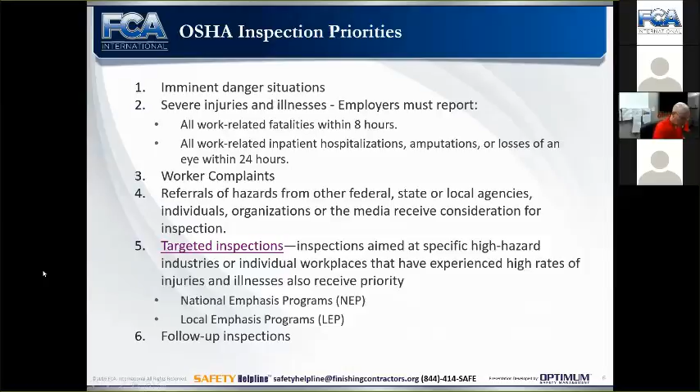So this is in Chicago, if you're on a project, once that project hits 10 stories or higher, OSHA is going to come out unannounced and they're going to complete an inspection of the job site. So that's a local emphasis program. And then our last inspection priority is a follow-up inspection. So that's how OSHA would come out and actually inspect.

And what is the process? So it's good to understand the process as well, so that in the event that you do have an OSHA inspection, you know your rights, you understand the process. So again, I've been involved in this process many times from top to bottom. Sometimes I get involved in the middle, sometimes at the very end. With our clients, it's best that they get us involved from day one immediately.

OSHA steps foot on site. They're telling the OSHA inspector, please hold on, I need to call my office. That should be a mandatory procedure for every company, right? Last thing you want is an inspection notice and citation in the mail, and you didn't even know they were on your job site. So you need to communicate that to your employees.

And at any point, if an OSHA compliance officer steps foot on the job site, they're to call the office, and we tell our clients, contact us right away. We'll get the inspector on the phone. We'll ask them to wait a reasonable amount of time, which is about 45 minutes. They will wait to get a management representative out on site. Sometimes that's tough to do if the general contractor is controlling the inspection and they don't inform you about it. Hopefully they do. Or if they're taking it on and starting, the compliance officer is going to start with them.

But there must be an opening conference, okay? There has to be an opening conference. This is where the compliance officer is going to show you their credentials. There have been stories of fake OSHA compliance officers out there just saying, hey, pay me under the table, this will go away. So they do have to show you their credentials, and they have to tell you why they're there. What's the reason for the inspection?

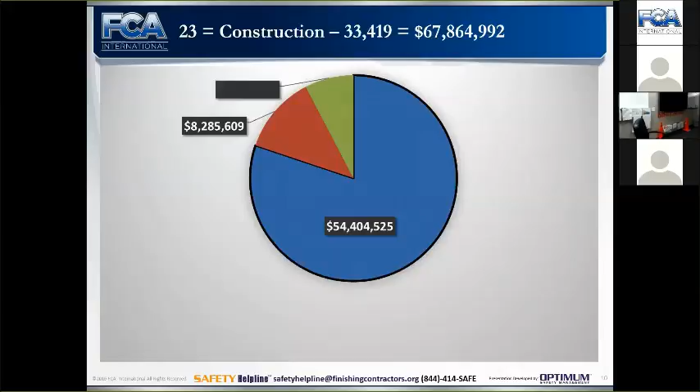So we look at construction only, and got it. Sorry about that.

My PowerPoint is all right. So we look at construction only, and in a year's time, there are about 33,000 citations, right? That total about $67 million. So again, that's half of the country. So if we double that and we increase it by 78%, we're talking about $240 million worth of penalties annually that OSHA brings in. All right, per citation, that's about $3,600. So this is pretty significant.

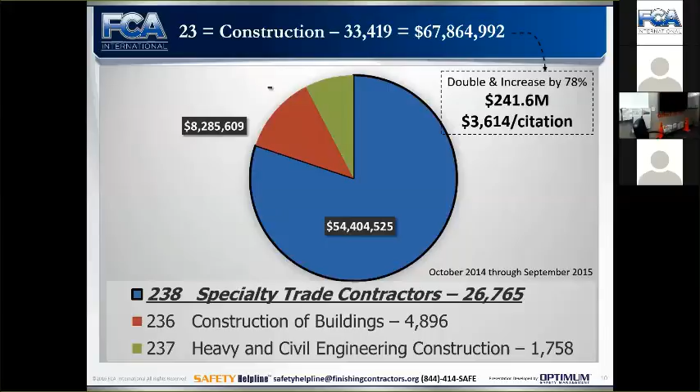Of all of that, specialty contractors are the bulk of it, over 75%. So finishing contractors, you're falling under specialty contractors. So that should get your attention, right? Construction of buildings, that's your general contractors. Heavy and civil, that's your road contractors. And now we're going on here.

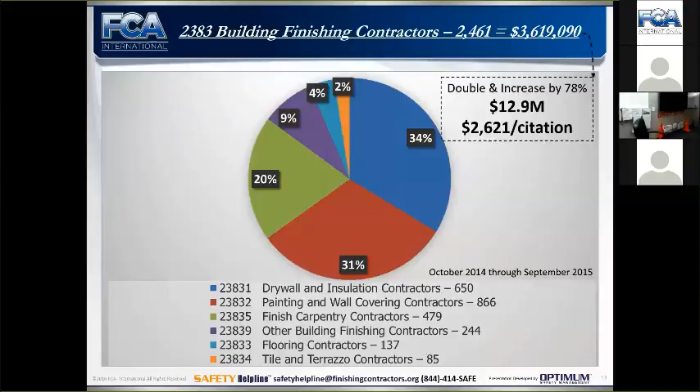That imminent danger, that's number one. Foundation, structure, enclosure, they're all exposed to outside. They can drive by and see what's going on. Finishing contractors, typically we're inside. They have to get in the building to catch us doing something wrong, okay? And then out of that, with our finishing contractors, a third of it is drywall and insulation contractors. A third is painting and wall covering, about 20% finished carpentry, and the balance is everybody else. So you can kind of see where the citations are coming from here.

Working at height, right? So working at height, the number 1 fatality in construction is falls from heights greater than 6 feet. Okay, so 1 through 6 on our top 10, that reflects the same thing. Where are the citations coming from? Working at heights. So any work at heights, you definitely need to be zeroing in on, taking a look at.

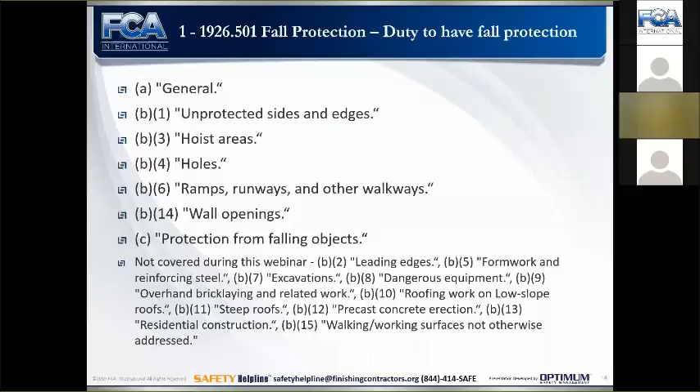So if we're getting cited for 1926.501(a)(1), we want to go into that informal conference and try to narrow down the situation, right? We want to say, hey, this had to do with a hoist area not having fall protection, so let's have (b)(3) cited. (a)(1), you can repeat that. Repeats, again, could be up to $125,000. So you don't want a citation that would be easily repeatable because it's so big in scope.

So what is 501(a)(1) saying? Pretty much all it's saying is that the employer is required to provide fall protection systems, as stated in 502. Okay, great. (a)(2) is talking about structural integrity of the floor, right? So if we're sending someone into a remodel, let's say, we need to know that floor is structurally sound. So walking working surfaces structurally sound. Okay.

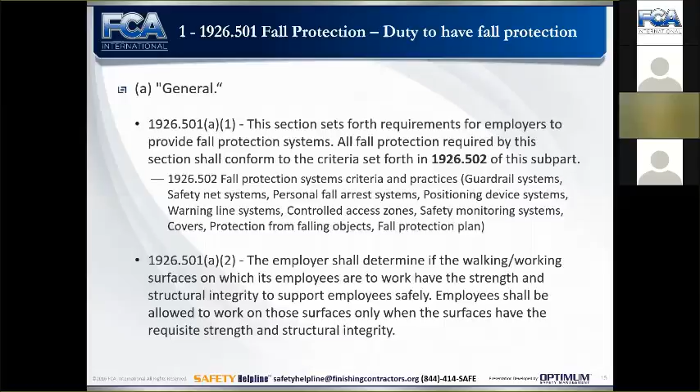So unprotected sides and edges. Anytime we have an unprotected side or edge and a fall hazard of 6 feet or more, we must protect our employees with a guardrail system, safety net system, or personal fall arrest system. That is it. So if you're using anything else, chances are you're out of compliance, right? Safety monitors, warning lines, controlled access zones have nothing to do with finishing contractors and everything to do with precast, bricklayers, leading edge, roofers.

Okay, so if you're trying to rely on something like the safety monitor, warning line, fall protection plan, controlled access zone, let's relook at our operations. Let's do a job hazard analysis. Let's put into place guardrail systems, safety nets, or personal fall arrest systems, because per OSHA, that's all you can use.

Okay, hoist areas. So I see this a lot. We're going to hoist material in through a window possibly, or we're going to take a guardrail down to lift up material to another floor, right? We need our fall protection, a guardrail system or personal fall arrest system. It has to be in place before we take that window out, before we take that guardrail down.

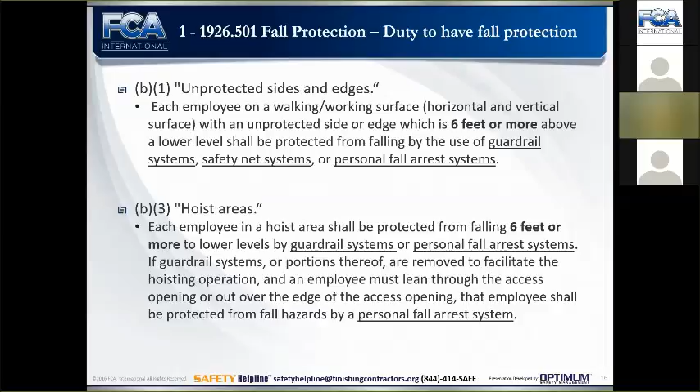And then we have our controlling contractor. That's the general contractor. If they knew about this or there was a pattern of people taking down guardrails, leaving them, exposing other contractors, right? They're going to get roped into it as well. So this is exactly what we're talking about here when we're loading in to these areas.

So if there's a fall hazard, again, 6 feet or more, that's the magic number for federal. I know Cal OSHA is 7.5. I'm not sure about other state plans, but federal OSHA is 6 feet when we're talking about unprotected floor edges on walking working surfaces. We'll get into scaffolding. Fall protection requirements are a little different there, where they let you go up to 10 feet. Steel erection, we don't need to talk about because finishing contractors, we're not doing steel erection. They have some special rules there.

General industry, well, we're construction, so we're going to stick with their 6 foot. General industry is 4 foot. So 6 feet is the magic number. That's the one we want to be thinking of at all times. So do we have the personal fall arrest system in place before we take the guardrail down? Do we have some kind of barricades up behind where other employees can't access that area?

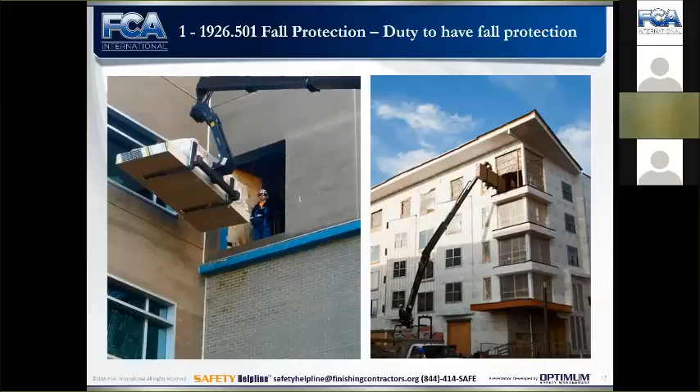Holes. Absolutely. Holes need to be covered. So OSHA defines a hole as a gap or void 2 inches or more in its least dimension. So you can have a 1.5 inch slit going 10 foot down a floor, and that's not considered a hole. All right. Probably still a good idea to get it covered. We could kick stuff down there. You know, maybe OSHA could cite us for other reasons if the floor was dirty and people were walking down there and stuff was falling, right? But technically it's not a hole. So 2 inches or more in its least dimension.

So any core holes, obviously, any square openings, they need to be covered, right? When we have a fall hazard of, again, 6 feet or more. They call out skylights in the standards, skylights. So these are huge. So if you're up on a roof area and there are skylights, we have multiple fall hazards to consider, including fall off the roof, right? So we'll get into talking about parapet walls here in a little bit. But what about these skylights? Are they protected?

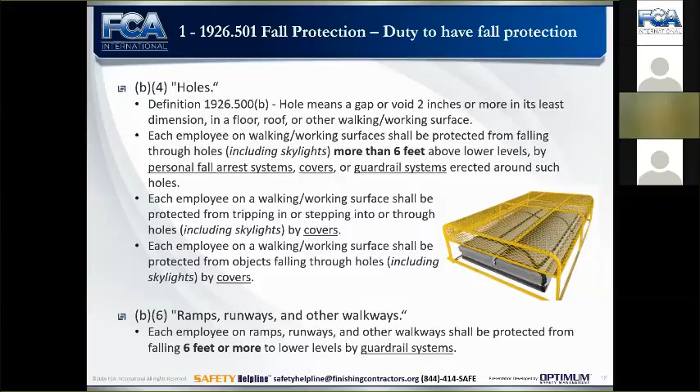Wall openings. So they call out trash chutes, which is a great example, trash chute, but any wall opening, all right? If the opening is 39 inches off the ground, you're good. Any lower than that, we have issues. When we talk about guardrail requirements, this all makes sense. So that opening cannot be lower than 39 inches. Once it is, we need a guardrail system in place.

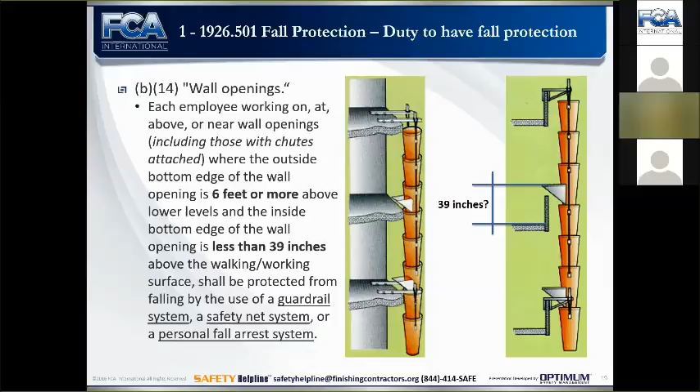Protection from falling objects, absolutely. So anytime we're going to have a floor where objects could fall, or a mezzanine level where objects could fall, or some scaffolding where objects could fall, we need to protect our employees. OSHA says we need to protect them with a hard hat plus one of the following measures. So we're getting into where OSHA's calling out now some PPE, right? Personal fall arrest, by the way, is PPE. So we've already been talking about PPE.

When we're thinking of hazards, we want to think of the hierarchy of controls. And it doesn't start with PPE. So a lot of times we're thinking, oh, there's a hazard, throw some PPE on them. That's our last line of defense. Always our last line of defense. So we want to be thinking, how do we eliminate this hazard altogether? If I can't eliminate it, how do I protect the employee with some kind of administrative control, some kind of plan, procedure, some kind of engineer it out with the guardrail system, right? Engineer the hazard out. Last, PPE.

So we need hard hats, and then we need erect toe boards, screens, guardrail systems. Maybe we need a canopy, right? An overhead canopy. So different areas, barricading off areas. So when we're talking about loading, we saw the picture of the gentleman loading drywall into a building. What's going on below there? We got to restrict access from employees walking under there. How are we doing that?

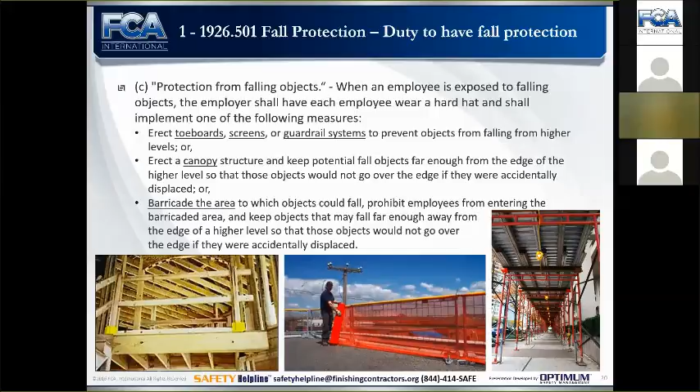Hopefully, at bare minimum, we're putting up some danger tape. That's an extremely dangerous situation. That fall could potentially kill someone. So warning tape would not be acceptable. Minimum would be danger tape. A lot of general contractors are moving towards a robust physical barrier. So some kind of guardrail system, some kind of a barricade system that, you know, someone can't just duck under the danger tape, or we can't walk through it, or it rips, or it's blowing around in the wind. They want something sound and structural there.

So we're going to jump down to number 5, since we're talking about fall protection, and we just talked about guardrails, personal fall arrest systems. But OSHA has more to say. They have specific system criteria and practices for all of this. So we not only have to have the fall protection in place at the right time, we have to be using it the right way as well.

So we're going to talk about all of these. We are not going to talk about positioning devices, warning line systems, controlled access zones, safety monitoring systems, or fall protection plan. If you believe you need to use one of those for something and have further questions, great opportunity to reach out to the safety helpline.

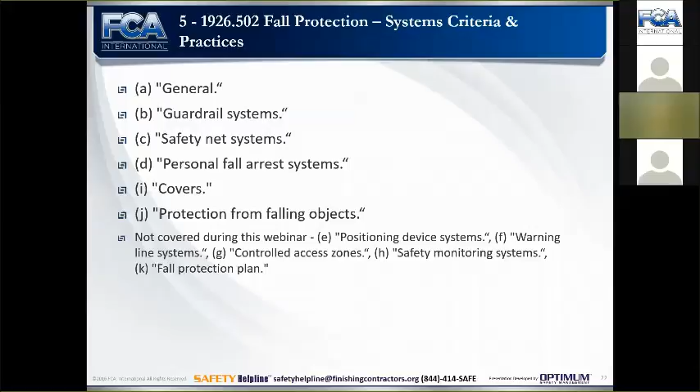Okay. So general, 502A, they're saying that we have to comply with everything in this section. And then they're saying that the fall protection has to be in place before the employee begins the work, before the hazard occurs, before they're exposed to the hazard. Pretty common sense, right? We got to have the fall protection in place beforehand. So makes sense to me.

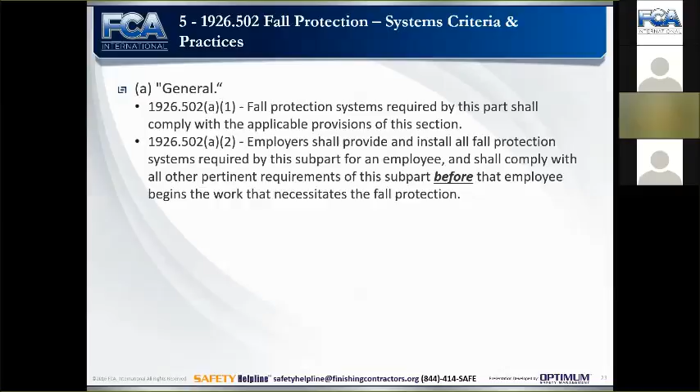Guardrail systems. Okay, top rails, 42 inches plus or minus 3 inches. So they're giving us a little bit of leeway there. They do that for multiple reasons. One example, if we're talking about that trash chute, was at 39 inches, or if it was at 40 inches, you know, we have some play there. Parapet walls have a little play there. Anything below 39 inches, we're going to have an issue with.

We talked about that. Also, a lot of times when we pour the concrete on a metal or wood deck, we're going to lose the 4 to 8 inches. So it allows us to erect a guardrail at 45 inches, and then when we pour that deck, maybe it's at 39. So we get a little play there.

That top rail must be capable of withstanding 200 pounds of force in an outward and downward direction. So think about it. When someone's going to fall, they're going to fall down and out. So that guardrail system has to be able to support that. And when it's supporting that 200 pounds, it cannot deflect below 39 inches, which is our 42 inches minus 3. So that's an important number, 39 inches. Cannot deflect lower than 39 inches. So wood guardrail, if it's deflecting that much at 42 inches, I'm pretty sure it's broken by then.

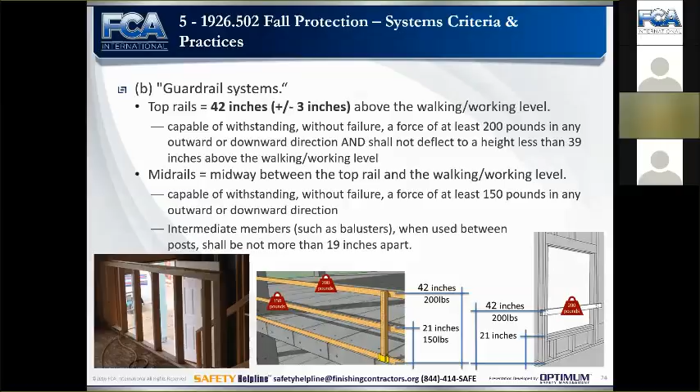We can use intermediate members in lieu of a mid rail if they're posts not more than 19 inches apart. So a lot of times we see this on our stud walls, 18 inches on center. You can just throw a top rail there and don't necessarily need the mid rail if they're not more than 19 inches apart.

Wire rope, so we already talked about this, the 39-inch sag, and yes, they must be flagged every 6 feet for visibility. A lot of times we see wire rope up for guardrail, and it's not flagged, and you just can't see it. So every 6 feet, that's as easy as tying caution tape on it. Sometimes the caution tape will slide all the way to one end, so maybe not a good situation if you're outside. Using high visibility netting, or any kind of visible netting for that matter, works just fine.

On the right, we have an example of a parapet wall, obviously lower than 39 inches, so we need a guardrail system, and it looks like it's maybe only 12 inches, so they have a mid rail on there as well. On the bottom left, we have some window openings. Again, if those are 39 inches, we're good. We don't need anything else. If they weren't, they would need to put some more protection up.

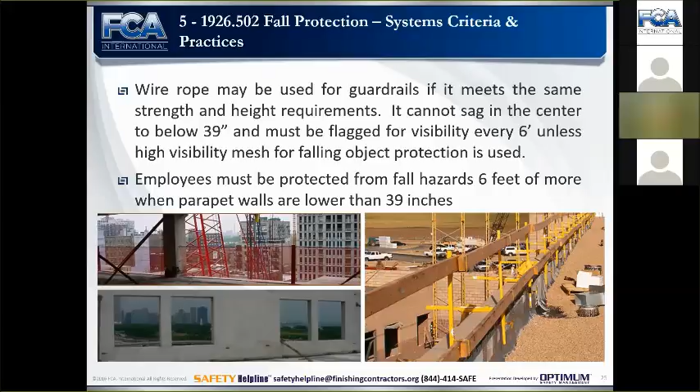Safety nets. We don't see this that often. Sometimes we'll see safety nets in a hole opening, a lot of times as secondary protection. I've seen it where it's actually underneath a hole cover in the event that hole cover gets removed and someone falls. They have the safety net there as a secondary means. You'll see them sometimes on some buildings outside the building. A lot of times it's for material, but it can be used for personnel as well.

In some situations, it might be useful, definitely as a secondary means. I've also seen people use personal fall arrest systems with safety netting below them. In the event that failed or someone forgot to hook up, the safety netting would catch them. Personally, I don't think it's a great choice for a primary means of fall protection. There are some very specific requirements here. We're not going to get into all of them, but the sizing of the mesh opening, the border rope strength, the type of connections. So you really need to dig into that if you're using these.

Depending on how far below the fall is, they need to be out a certain distance. So if they're up to 5 feet below us, they need to stick out 8 feet. 10 is 10, and then they can only be a max of 30 feet below us, and they need to stick out 13 feet. It's just kind of crazy thinking that someone would fall 30 feet into a net. But something to look at. Probably not going to be using that.

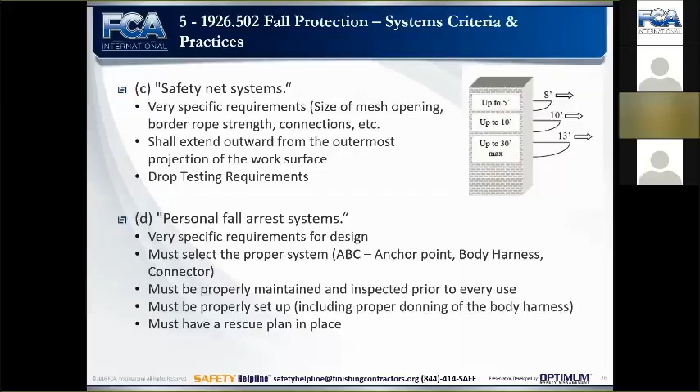A lot of good examples here. Top left, you have a horizontal lifeline system. Next to that, you have a vertical lifeline system with a rope grab on it. So again, you have the body harness, the anchor point, and then what's in the middle is connecting them. On both of these, it's a 6-foot lanyard with a shock pack. On the right here, you see a retractable lanyard.

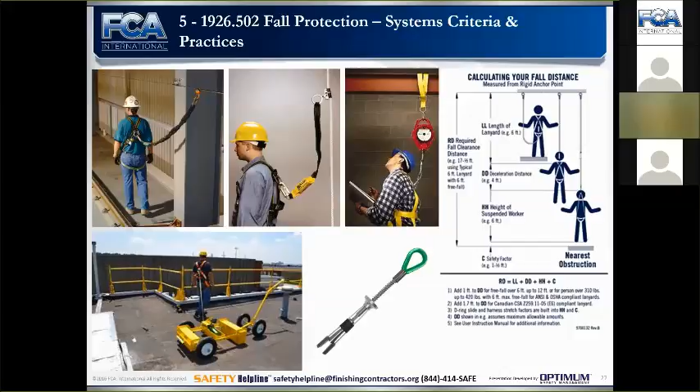So depending on the clearance distance below us, yeah, we say you need fall protection if you're exposed to a fall of 6 feet or greater. That doesn't mean that that's going to stop you from hitting the ground, right? If that fall is right there at 6'1", and you have a shock pack 6-foot lanyard on, and it's hooked up right at your back level, and you fall, by the time that elongates, you're hitting the floor. Probably not a good option. You need to get that elevated above your head, or a retractable, which is going to stop you a lot sooner. A lot of systems out there, drop-in anchors, where you drill a hole into a concrete wall and put a drop-in anchor.

Here's an example of one of the toolbox talks that all FCA members can have access to. We'll talk about that at the end here. But this is telling us on the left all the requirements. You know, the force on the body, it has to restrict to less than 1,800 pounds. Our anchor point has to be a 5,000-pound anchor point. So a lot of good stuff there.

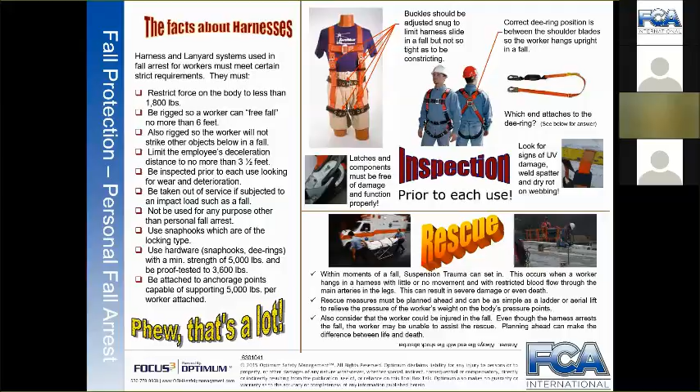Covers, they have to support at least twice the intended load. So if we're talking about out where vehicles are going to go over them, that's big heavy-duty plates. On a job site, is a scissor lift going to roll over it? If so, it needs to be able to support that lift, the tools, the guys on it, everything secured down, right? We can't just throw it there. It has to be marked or painted so it's high visibility, all right? Painted with the word hole or cover.

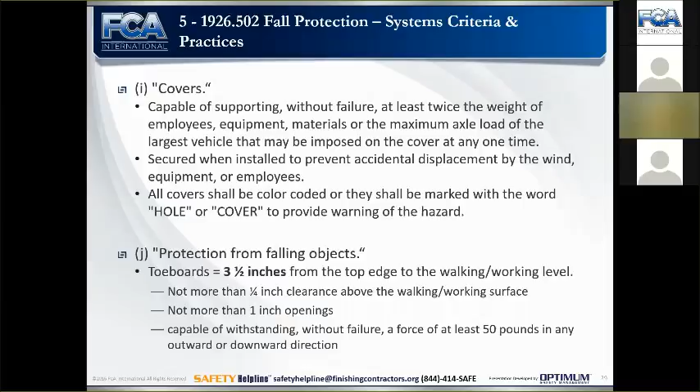Protection from falling objects, that's when we get into our toe boards, 3.5 inches from the working level. Can't have more than 1/4 of an inch clearance between it. Obviously, we don't want anything to roll under the toe board. That's the reason it's there anyways. Get that all the way down to the walking working level is best. Not more than 1 inch between toe boards as we're going along. All right, 50 pounds.

Scaffold requirements. So a lot of requirements for scaffolding go into the platform construction, how it's supported, what's underneath it. We have our supported scaffolding, we have our suspended scaffolding. Two different animals. How we're accessing the scaffolding. Hopefully we're not climbing it, right? We'll definitely get a citation there. How we're using it.

Fall protection on scaffolding bumps us up to 10 feet, right? 10 feet. A lot of job sites are going to say, I don't care, we have a 6-foot fall rule. Make sure the guardrails are on at 6 feet, all right? But the standard does say 10 feet. Falling object protection, a lot into this as well.

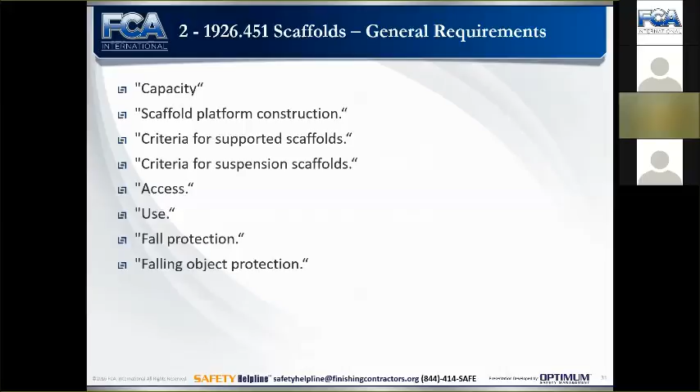You can see why if we go back here, this standard's citations is the most citations. Not the highest dollar value, but the most. There's a lot here that we can get cited for. A lot of scaffold use going on out there.

Again, toolbox talk here, great resource, weekly topic. We have tons of them. This one's on scaffolding. Capacity of the scaffolding, 4 times its intended load. All right. Are we using mud plates, sill plates underneath the scaffolding? It's absolutely required to have a sill plate, a base plate, right?

If we don't have that base plate and that tube is just sitting right on the concrete, it could start digging in. If we're outside, we need the mud sills, right? We don't want to start sinking into the ground.

Guardrails, they give us a little bit more variance here, between 38 and 45 inches. Okay, they're doing that because of the cross section. We can use that as a top rail. So if it falls in between that 38 and 48 inch mark, we can use it as a top rail. If it's lower than that, we can use it as a mid rail, but we can't use it as both, all right? So it's one or the other, and then you have to put another railing up.

Our platforms, no gaps, right? It has to be fully decked, no gaps. We're using scaffold planks, right? I love the engineered stuff that just clips on the platform. You can't have a gap in it. It clips on, it's fully decked. You don't have to worry about it.

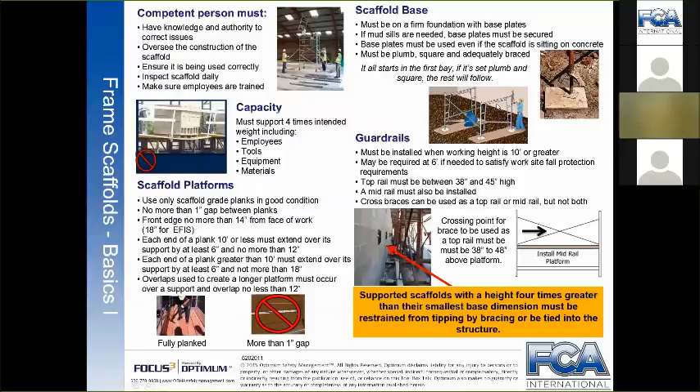We go back here. This end frame, it actually has a ladder built into it. You can utilize it. As we're stacking these, we want the ladder to stay on the same side, obviously. We don't want to flip-flop them. I've seen it before, right? That defeats the purpose. Cannot climb the cross braces.

Cannot get over the guardrails. Shouldn't be standing on buckets anyways, but we're not going to put a ladder on the scaffolding to gain height. If that's the case, maybe we need another tier of scaffolding. 4-to-1 ratio, minimum dimension to height, 4-to-1. When you're outside of that ratio, that thing's going to tip, so it needs to be supported. Outriggers or tied into the structure.

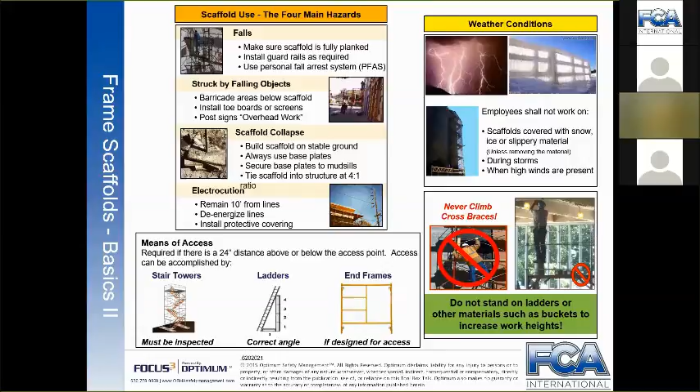Rolling scaffolding, I know we're using a lot of this. All of these come with manufacturer's instructions and safety procedures. It's good to look at. It's good to train your employees on that, especially if all you're doing is using these rolling scaffolding. Pull out the manual, do a training on it. It's going to tell you the proper way to set it up.

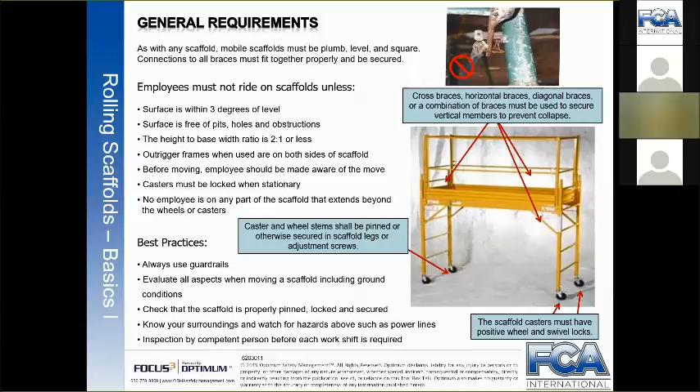It's going to tell you that when you go at 2 tiers, you need to have the outriggers on, right? These things can easily tip over. We don't want to be skating with them where the wheels aren't locked and we're shimmying our way around. They need to be in good condition, fully guardrailed. A lot going on there.

Going to keep moving on here because time is getting away from us. Going to roll into aerial lifts. So the scaffold standard that we just looked at, 1926.451, that includes scissor lifts. Okay, that includes scissor lifts.

1926.453 is separate, that's aerial lifts. So I know that there's a bunch of confusion out there, and so I want to try and clear it up. So a scissor lift, your traditional scissor lift, whether it's for inside or outside use, all of the guardrails should be in place and in good condition. The gate should be closed. The chain should be up. Whatever the case may be, if it has a gate or a chain, all of that's in place. If not, you can receive a citation just for a chain being down.

Since all of that's in place and we're working on the platform, we're not climbing on the guardrails. If you climb on the guardrails, you can receive a citation. We're working on the platform. OSHA does not require you to have personal fall arrest on. Now, that being said, there are a lot of general contractors out there that are requiring that we have personal fall protection inside a scissor lift. Okay, we're talking about scissor lifts still, not aerial lifts.

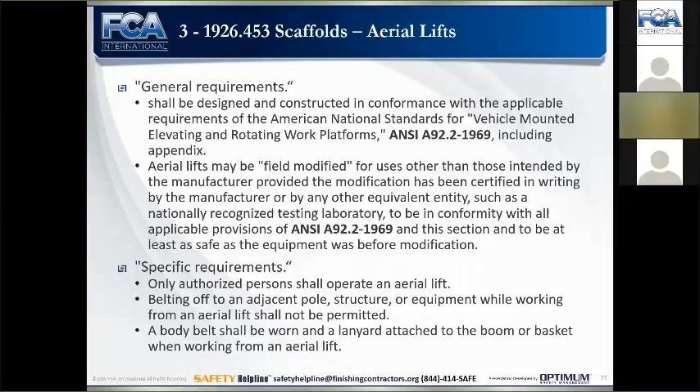Specific requirements. Only authorized people can operate aerial lifts. Yeah, you need specific aerial work platform training. Belting off to an adjacent pole or structure. Big no-no. Cannot be doing that. And be tied off 100% of the time. So not only do we need to have a full-blown aerial work platform training in the classroom and then a road test, anytime one's delivered to us or we rent one, we need a familiarization training.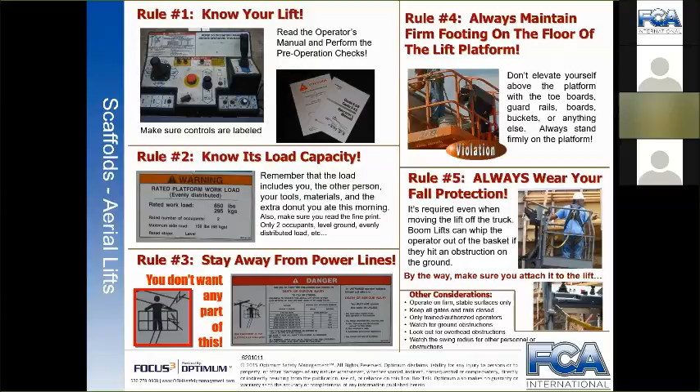That's as easy as asking the guy dropping it off to you, hey, I haven't used this control system, can you go over it with me real quick? Or, I've gone through this, let me see if I understand it, yeah, I'm good. Right? It takes 5, 10, 15 minutes on site. Manuals have to be in the lifts. Know the capacity, stick to the capacity. Power lines, 10 feet minimum clearance, and then it's going to have the placard right on there, how far to stay away. We've got to be honoring those. Let's not work off the mid-rail. If you need a little bit more height, it's a push of a lever, and that thing will go a little higher for you. 100% fall protection.

All right. So training requirements. So we're talking about scaffolding and fall protection. We have to train our employees. So for scaffolding, any employee who performs work on a scaffold, so that's your classic scaffold user training, must be trained by a qualified person. Okay. So if they're going to use a swing stage, they have to be trained as a swing stage user. If they're going to use a supported scaffolding, they have to be trained for supported scaffolding.

Any employee who's involved in erecting, dismantling, moving, operating, repairing, maintaining, or inspecting a scaffolding must be trained by a competent person. So our erector, dismantler training, that's over and beyond a user training. So if you're putting up scaffolding, you have to be trained specifically to those hazards associated with it. If you're installing a swing stage, you better know how to do that, because you're having a lot of people

trust you, right? And then anytime the employer believes that an employee lacks the understanding or skill, maybe we change out this kind of scaffolding we're using, we need to retrain. Maybe we witness the employee not doing the right thing, we need to retrain. So not only could we get a citation for not doing it the right way, if we don't train our employees the right way, we'll get a citation. If we don't have a program also, we'll get a citation. So one situation could result in 3 citations.

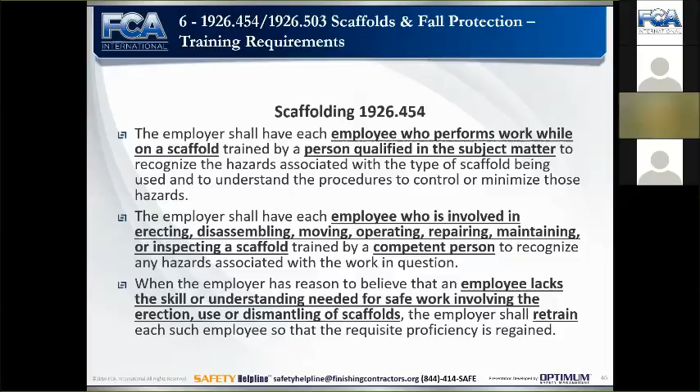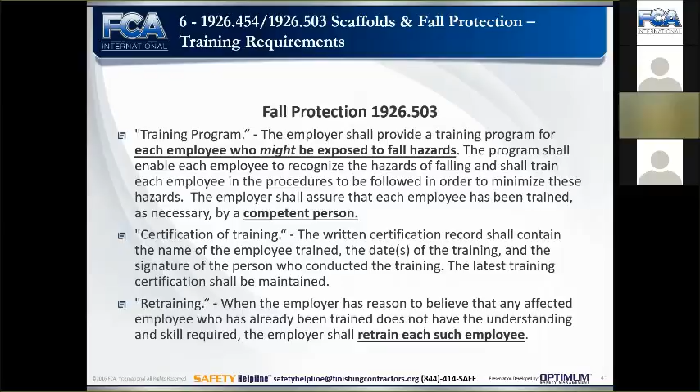Fall protection, each employee who might be exposed to fall hazards. So if you have a hunch that they could be exposed to fall hazards, you have to train them. Need to be trained by a competent person, okay? So that could be as simple as we just need to train them on what a guardrail should look like. And if the guardrail is not in place, they can't work in that area. And if it is in place, they need to make sure that it's OSHA compliant, right? It might be that simple. If it's personal fall arrest, we have a lot of training to do. We need to certify that training and keep it on file.

Ladders, more working at height. We need to not only inspect our ladder. Let's start by picking the right ladder for the job, right? Same way we pick the right tool for the job. If we need an extension ladder to get up to another level, let's not take an A-frame ladder, fold it in half, and lean it up against the wall, right? That's a violation. So if we need an extension ladder and we have to get up 20 feet, well, let's not grab a 20-foot ladder. We're going to need one significantly taller than that.

We have to take into consideration that it has to be 3 feet above the landing, and we have to get it back at a vertical to horizontal ratio of 4 to 1, right? So let's pick the right ladder. Once we pick the right ladder, let's inspect it, right? If it's damaged, a lot of times I hear, well, we sent the damaged ladder back, and on the next job we got the same ladder, right? Well, our internal processes are broken.

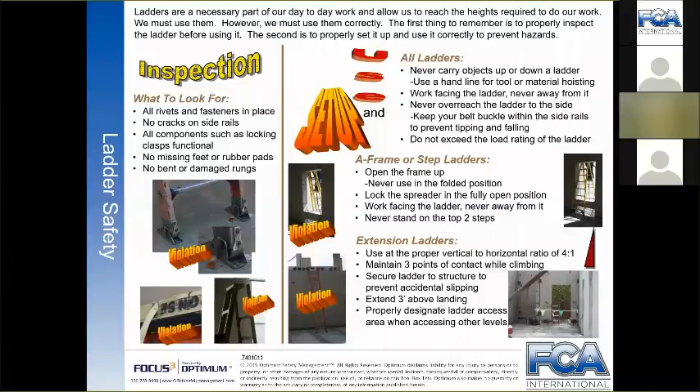Are we tagging it? One contractor, they started just taping it, right? They tape it together with red tape so you can't open it. So when it gets back to the shop, it's a very clear visual cue to the guy in the shop that something's wrong with it, and he can throw it away, instead of thinking that it can go out to the next job. And then let's set them up the right way, and let's use them the right way. Step ladders, we cannot stand on the top 2 rungs. Need to keep our belt buckle within the center, all that good stuff.

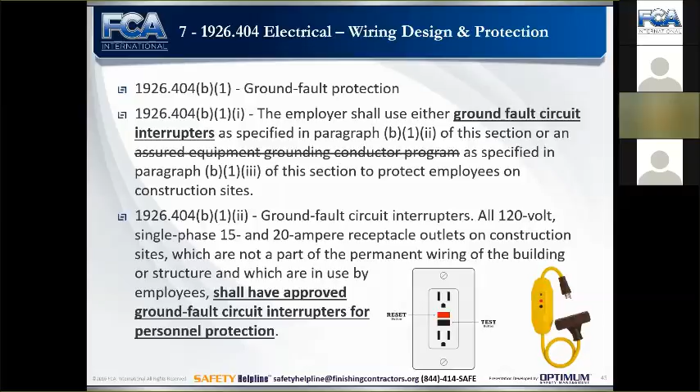My personal opinion is don't use the assured equipment grounding conductor program because it is a pain to comply with, right? Ground fault circuit interrupter: literally, you plug your outlet into a ground fault circuit interrupter outlet, or you carry these extenders with you and you require your employees to use those at all times. Assured equipment grounding, we're not going to go through it. I'll show you the standard. Looks like this. That is a lot to comply with. If you're not doing it right, you're getting a citation, right?

You've got to inspect every cord. You've got to tape them. You've got to do this. You've got to do that every 3 months, this every 6 months. Don't do it. Use the GFCI protection. Use the GFCI protection. It's easy, right? It's easy. It's going to protect your employees from electrical shock.

Okay, how do they work? They're not a circuit breaker. A circuit breaker is going to protect the equipment. It's going to protect an overdraw so we don't heat up the wires in the wall and have a fire in the wall, or we don't burn up the electrical panel, right? Circuit breakers are 15, 20 amp breakers, right? GFCI, it does its job at 1 milliamp. That's when it's tripping, 1 milliamp. So 20 amps versus 1 milliamp is life or death, right?

So what it's doing is it's throwing so many amps out there. I got this power drill and it's pulling 5 amps, right? If it doesn't get all 5 amps back within, I'm sorry, it's 5 milliamps. Within 5 milliamps, still very, very small, 0.005 amps, within a fifth of a second, that thing's gonna click off, right? So if it's not getting all of that back, it's losing it somewhere. And it's most likely losing it because we're using a bad cord and we're standing in water and we're grounded somewhere, so it's going through the employee, right?

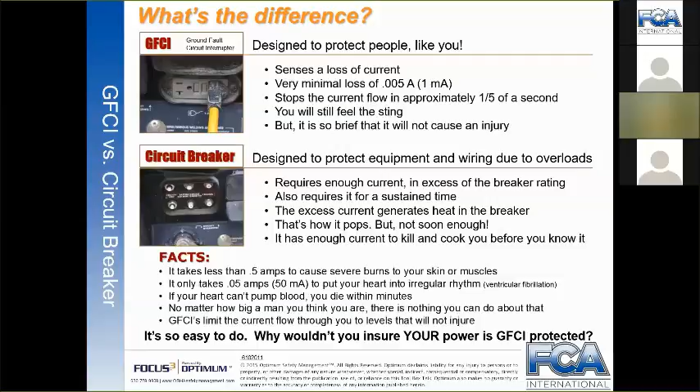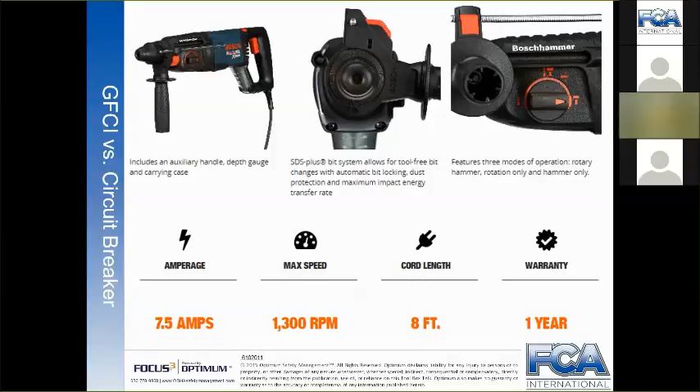You know, this is not an ad for Bosch, but I just threw this in here. This is advertised to run off of 7.5 amps, which is pretty high. But even if it was 2, it only takes a little bit of that to kill us. So as a little extra bonus, that was 404, right? So we're going back to 405 here. You're going to see some stuff for 405. That's number 11, so top 11. And there's a lot in here that we can learn from and use and take a look at on our job sites.

All right, so lamps have to be protected from accidental breakage. You're probably thinking, but we're not electricians, not our responsibility. If you're exposed to it, you can be cited. Temporary lights can't be suspended from their electrical cords. I'll show you an example of that. Flexible cords, if they're going through sharp corners or doorways, they need to be protected, right? That happens all the time. Your extension cords, are they in good condition? Do we have the right type of extension cords? Hard or extra hard? All right.

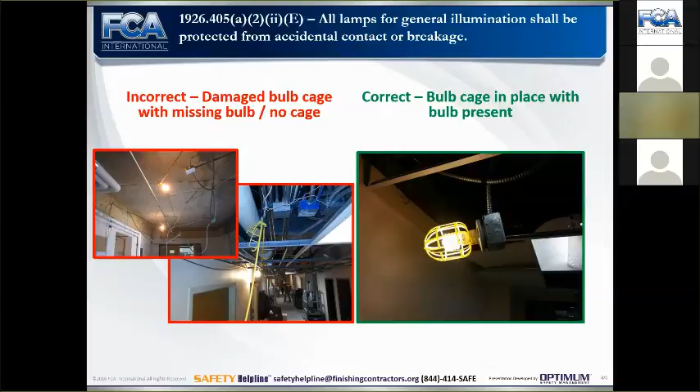So here are some examples. These cages on our lamps, they're all broken. You have employees exposed to that, where the actual lamp is broken and that's energized. Your employees are exposed to energized parts. You can get cited. Your employee could get injured, could be electrocuted. See this all the time, where the photo's in red. That's wrong. The lamp is just hanging there by electrical wires with wire nuts, right?

Great example is this same situation in a corridor. Put the drywall up, cut around it. The drywall was up. The taper goes in there. He's taping around there. OSHA comes on site and says your employees are exposed to electrical hazard taping around those live wires there with wire nuts on them. They received a citation. Electrician received a citation. General contractor received a citation.

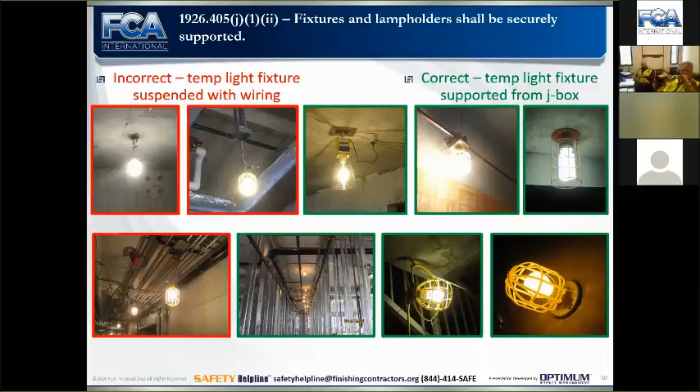So if that's going on, talk to the general. Let them know that that needs to be fixed, right? It needs to be supported differently. It needs to be enclosed. Are cords on the ground? If so, they're going to present a tripping hazard, and when they get damaged, they will electrocute someone.

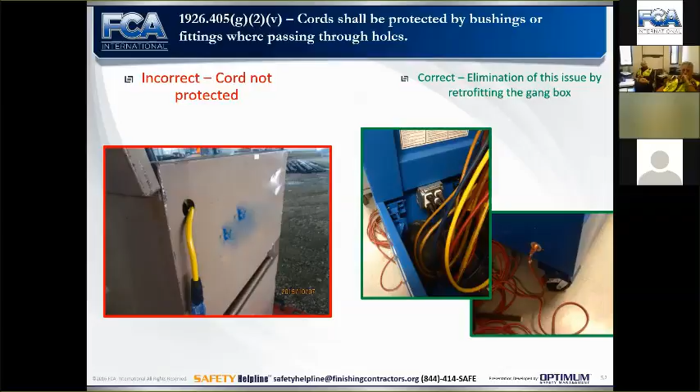I thought this was a creative idea for sharp edges on this gang box. They installed an outlet inside the gang box. That's good. But yeah, are they run through doorways? Are they going to get damaged? If so, we need to take a look at that. And then homemade splitters. Come on, this is crazy, right? Let's use the GFCI stuff.

Nice three-way splitter. By the way, with the GFCI, if we're using a three-way splitter, I see a lot of times that we'll roll an extension cord all the way out and then use that splitter. That whole extension cord is not protected. So if it's damaged in water, someone walks through there, could have an issue. So we want to have the GFCI protection at the source, all the way at the electrical outlet.

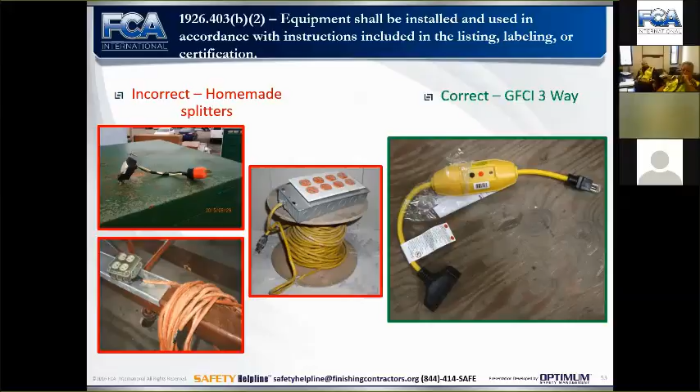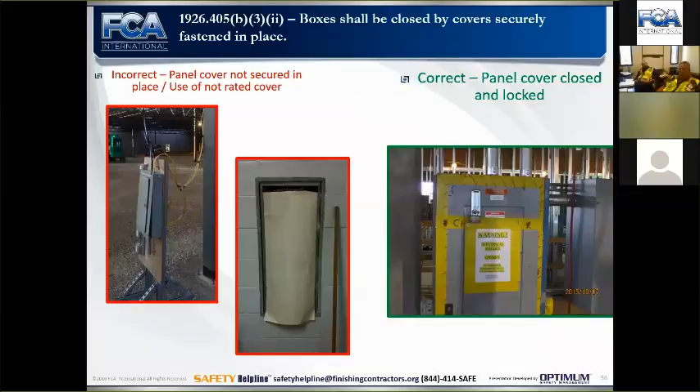Moving along here. Lead, this is huge, right? This is a huge standard. It has a lot going on in there. If you're working with lead, I really hope you already have a program. You figured this out. If not, let's talk. Let's make sure that you get this figured out. You will get cited. Your employees will get exposed. Not only will they get exposed, they can bring this home to their family. They can expose their family. Some nasty stuff. You don't want to mess around with it.

In summary, it's given us definitions. One major definition that you need to know of is an action level. This is when you need to take action. When all of this starts applying is when you hit over 30 micrograms per cubic meter of air of lead concentration over an 8-hour time-weighted average. So if all of that sounds really foreign to you and you're using lead, let's talk. We need to get some air monitoring going. Once you trip that 30 micrograms, all of this takes play, right?

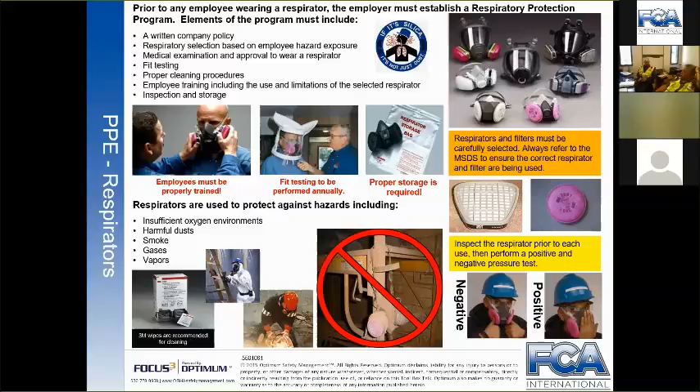After we train them, we're going to fit test them, make sure that their respirator fits them. Okay. If you're not exposed to any contaminants where respiratory protection is required, you don't need a full-blown respiratory program. However, you would need a respiratory program that only addresses dust masks used on a voluntary basis. Okay.

So on a voluntary basis. Dust masks are considered respirators. They're a filtering face piece respirator. N95 has to be printed on it. NIOSH N95, the word NIOSH has to be printed on it. Your employees still have to be trained, right, to Appendix D annually. So this toolbox talk, if they sign this every year, they're trained and they can voluntarily use a dust mask when it's not needed, for nuisance dust.

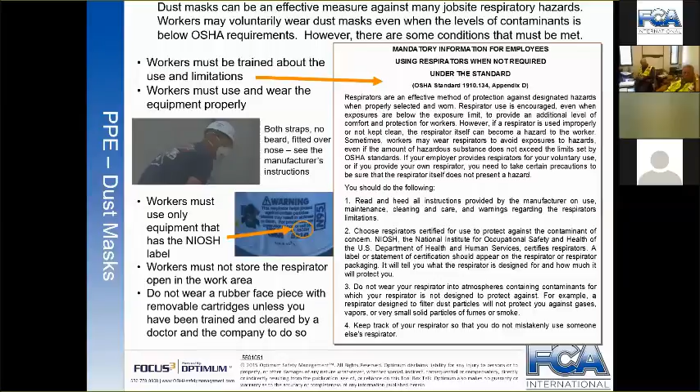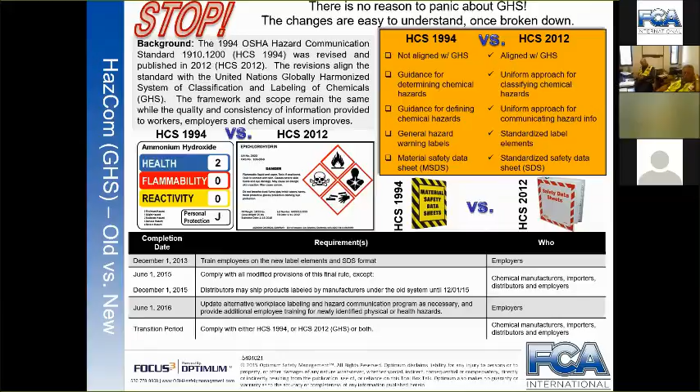Okay, our last one here is hazard communication, and then we'll be wrapping up. So hazard communication. A couple changes here from the '94 standard. The standard was revised in 2012, and it's had a phase-in period which just ended June 1st of '16. So we should be up to snuff now. If not, you're in the area where you could be cited, okay? So you're looking at some old labels, what they used to look like, safety data sheets versus material safety data sheets. So we'll dig into this a little bit.

So our MSDS, they renamed it to safety data sheet. They didn't just rename it. Chemicals now have to be classified differently by the manufacturer. So that's their job. And then they have to present it in this same 16-section format. So in the past, if I wanted to look up first aid measures, it was kind of all over the place. Now it is specifically in section 4 all the time, so it's a little easier to read.

Our responsibility is to make sure that we do a chemical inventory. We know what chemicals we're using. We have the safety data sheets up to date for all the chemicals, and they're available for all employees. So having a book that goes in the gang box, in the truck with the employees. We can't keep these locked behind a door. They need to be there where the employee can access it.

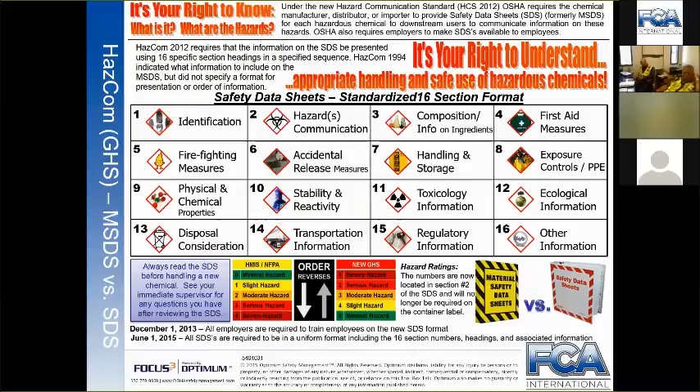And labels, this is a little bit more challenging. In the past, we could smack a label on it with health, flammability, reactivity, and write numbers on there with the name of it, and it was a done deal, right? Nobody knew what any of that meant. Nobody knew the difference between a 2 and a 4 for health.

The new labels are going to have these pictograms. If I see a skull and crossbones, I'm paying some special attention, right? Before, if health was 3, maybe I wasn't too concerned. If it was 2, maybe I wasn't concerned at all. But maybe now it has a skull and crossbones on it.

So it's going to tell us the name. It's going to say either danger or warning. It's going to give us the pictograms. And then it's going to give us a hazard statement. So may cause cancer, will cause cancer, may cause respiratory issues, will cause respiratory issues. It's going to tell us exactly the hazards. And then it's going to give us some precautionary statements, how to go about using this in a safe manner, how to store it.

First aid measures might be on there, and then the supplier identification. So how do we get these labels updated? Section 2 of the safety data sheet is label elements. You could take that information, put it on a label. You could call the manufacturer, ask them if they have any secondary labeling. I'm saying secondary labeling because all of our containers need to be labeled.

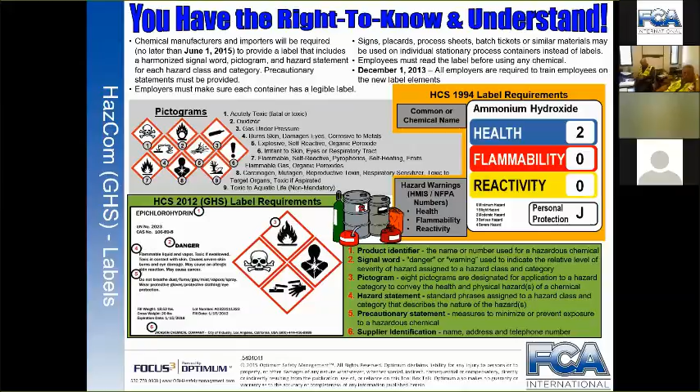So we don't want any of that. No beverage containers can be used for chemical storage. I don't even care if you have the right label on it. Can't use an old Gatorade bottle with the right label on it. Let's get the right containers.

Right? And then they went into the informal conference and they had a discussion about it and they got a reduction in penalty. So I would never just accept a citation. At bare minimum, go in, talk with the area director, let them know that you're going to move forward in the right direction and ask for a reduction in that penalty.